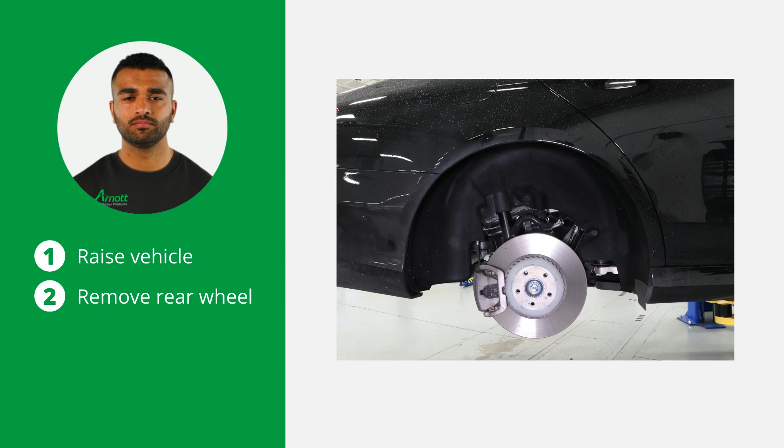Start by raising the vehicle and removing the applicable rear wheel. Disconnect the airline using a wrench. Remove the airline fitting from the air hose and discard it. To do this, remove the collet and the remaining fitting will slide off the air hose.

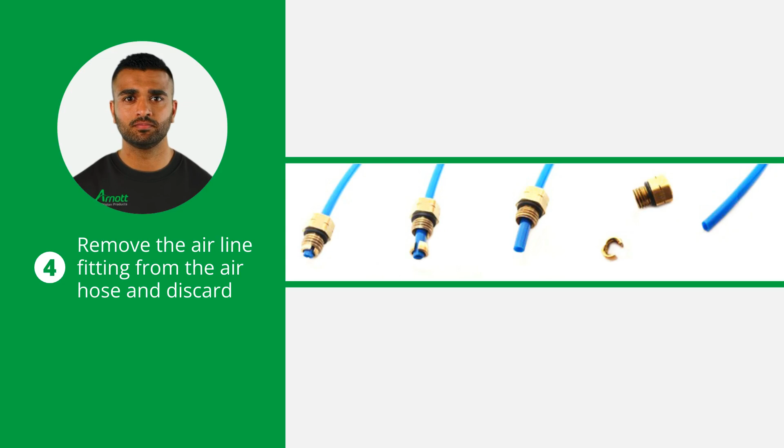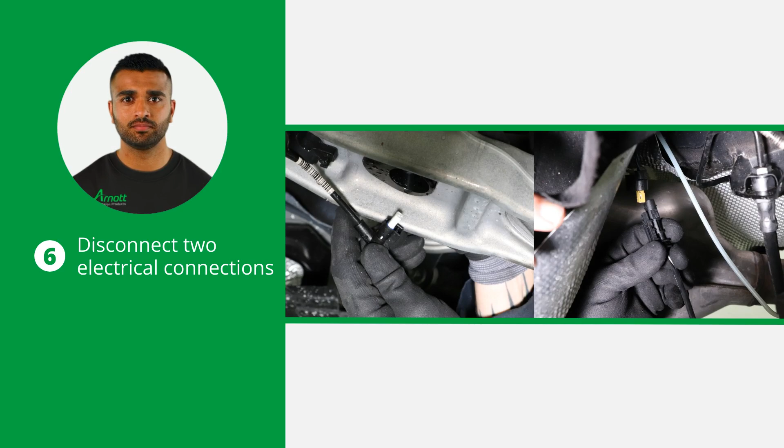Now remove the plastic cover. Continue by disconnecting the two electrical connections, one on top of the air spring, the other one on the bottom. To complete the removal, compress the air spring and remove it from the vehicle.

Pull and remove the shipping pin from the new Arnott Air Spring. Now you are ready to install the new air spring into the vehicle. Make sure that the spring is seated securely in the correct orientation.

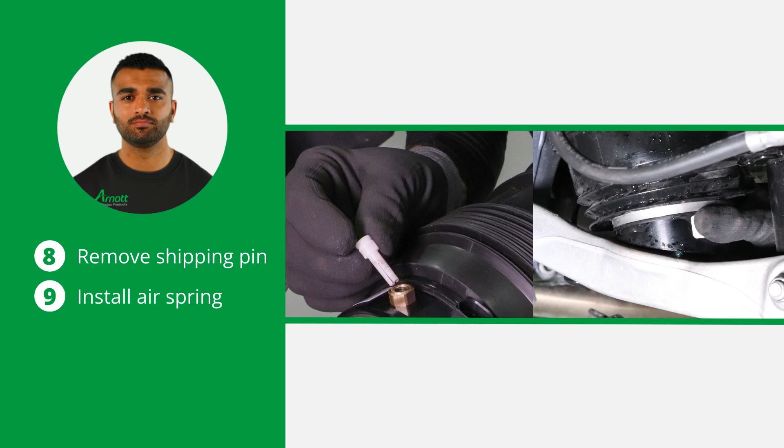Reconnect the air spring's electrical connections on the top and at the bottom. Install the airline by pushing the line into the fitting until it is firmly seated. Then reinstall the lower control arm plastic cover.

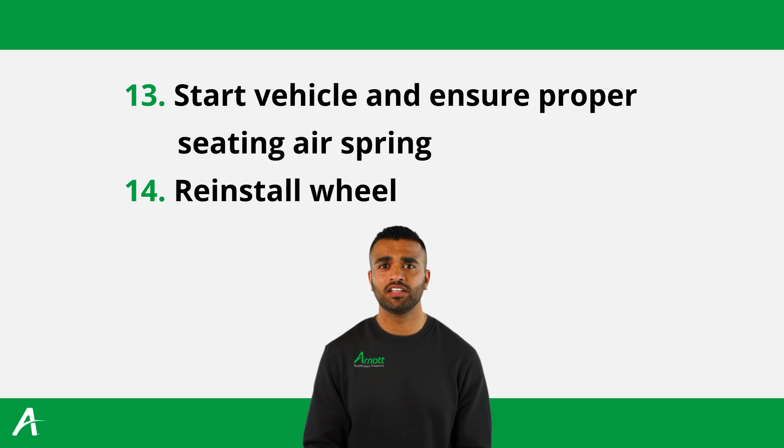Start the vehicle and check if the air spring is properly seated as it inflates. Then reinstall the wheel, tightening it to the vehicle's manufacturer's specifications. Continue by lowering the vehicle until the wheels touch the ground. Check the air spring again to make sure it is properly seated. Then lower the vehicle completely.

You have now completed the installation. Thank you for following our guide on replacing the rear air springs with an Arnott part. Proper installation ensures the longevity and performance of your vehicle's suspension system. Stay safe and happy repairing.